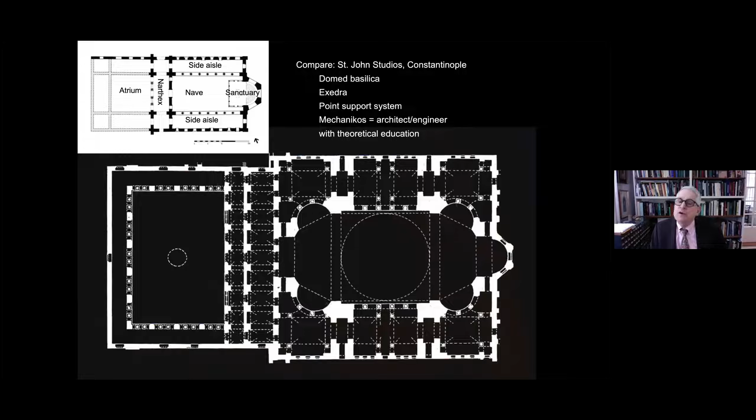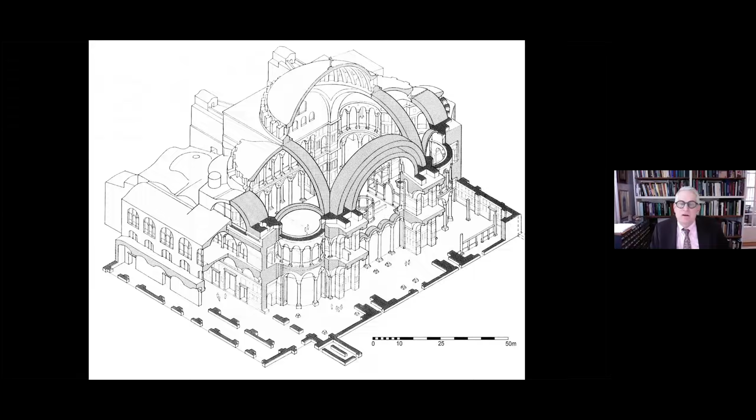And here we can see in the design of the building the system of arches and vaults that is adjusting the thrust, the weight of the building, to the piers, the pier support. What this does is the areas between the piers become open, spacious, and filled with light. Here, looking across the nave, we can see the openness of the side aisles and particularly of the outer walls of the building behind them.

The typical opening in the wall of the building is, well, we have arches that are supported on piers, and underneath the arch, we have a curtain wall that is almost entirely given over to window. We have closure panels in the lower level, casement windows just above that, and then above that, we have glazing, so that the system is remarkably open. Now we have to realize that it is that arch that is the structural system, and everything underneath that arch is incidental to it. So we have, with the point support system, a great degree of openness that allows light to enter the building at multiple levels.

The system of point support extends through all parts of the building. When we look at the dome as it comes down to us today, the original dome collapsed and was rebuilt in 563. I'll talk about this later, but the original dome was similar in detail to what we see now. That is, it was a ribbed dome with the thin construction of the dome of brick and mortar strengthened by ribs, kind of like an umbrella is strengthened by its ribs. But this allows a ring of windows around the base of the dome, 40 ribs strengthening the dome with 40 windows opening around its base.

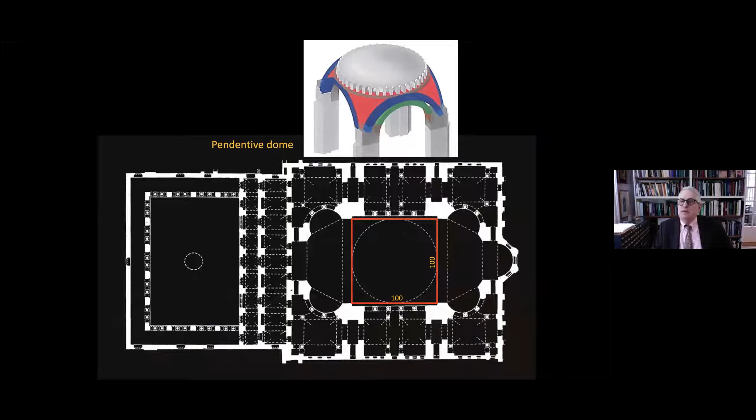In Byzantine measure, slightly larger than our modern feet, but 100 by 100 Byzantine feet, measuring off that central space. So the original dome, a pendentive dome, was transformed as it was rebuilt into a dome on pendentives. What are you talking about? Okay, let me explain in a way everyone can understand. And this is an experiment you can do over breakfast tomorrow morning.

Okay, start with a grapefruit. A grapefruit is round. It's round in 3 dimensions. That means it is spherical. It is a sphere. If we cut the grapefruit in half, we are left with a hemisphere. Are you still with me?

Okay. If we square off that hemisphere at the base, what we are left with is the configuration of a pendentive dome. That is, a dome that rises above a square base with the curvature continuous from the corners across the crown of the vault. And if we then cut off the top of the grapefruit, let's say the dome collapses, we're left with just what we see down here, and that remnant of the original surface of the grapefruit is the pendentive. And that is the remnant of the sphere that is at the beginning of the design of the Great Dome of Hagia Sophia.

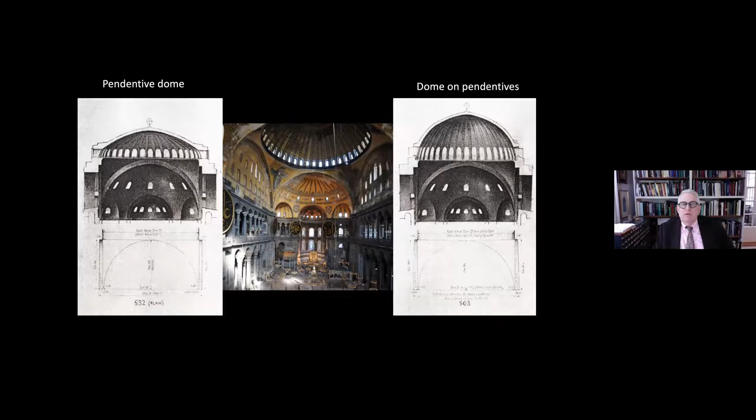Why is this important? Well, here first you see diagrams that show the much lower form of the original dome and the form of the dome as reconstructed after the original dome collapsed following an earthquake in 557. So to make sense of all this, let's get all Pythagorean here for a minute. If we have a 100 by 100 foot square that defines the main bay of the building underneath the dome, the original dome is not going to be defined by the geometry of that square. It's going to be defined by the diagonal of that square.

And you know from your Pythagorean theorem that the diagonal of a 100 by 100 foot square is going to be an irrational number. Now, the ancient Greeks and the Byzantines did not fully understand irrational numbers. They tended to round things out. And no architect, no matter how talented in the 6th century, would have begun the design of a great building like Hagia Sophia starting with an irrational number. He would have started, or they would have started, with a rational number. So how do we explain this discrepancy?

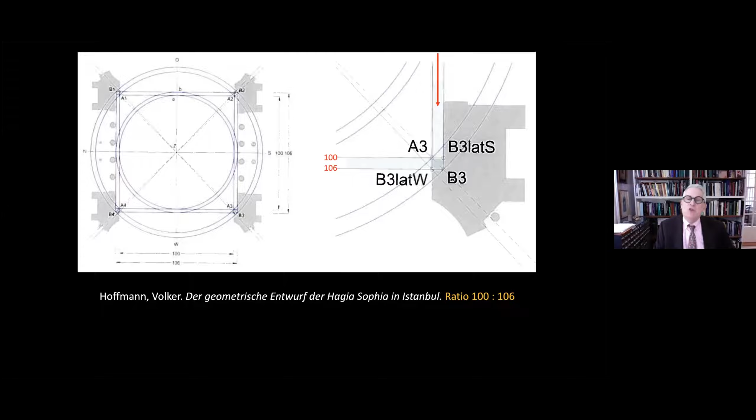And the best explanation that has been given, I think, is that explanation given by Volker Hoffmann, who suggests that the design of Hagia Sophia's first dome is not just based on the 100-foot square, but there is an additional width to the nave, about 3 feet on either side, so that we actually have a double square, the outer square here measuring 106 feet rather than 100 feet. And this, carried up to the level of the vaulting, would allow setbacks at the level of the vaulting.

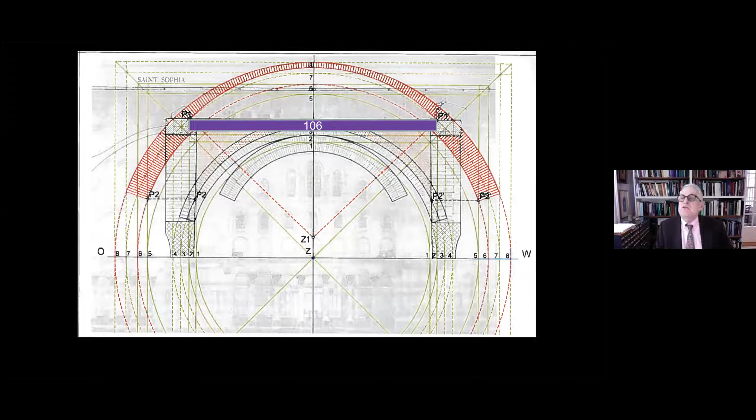Why is this important? Well, if we move back to our Pythagorean theorem here, and we go to a 106-foot square, the diagonal of that is going to be 149.91 feet. That is close enough that the Byzantines would have counted it as 150 feet. What this means is that Anthemius and Isidorus did indeed begin with a round number. And they began with a very significant round number.

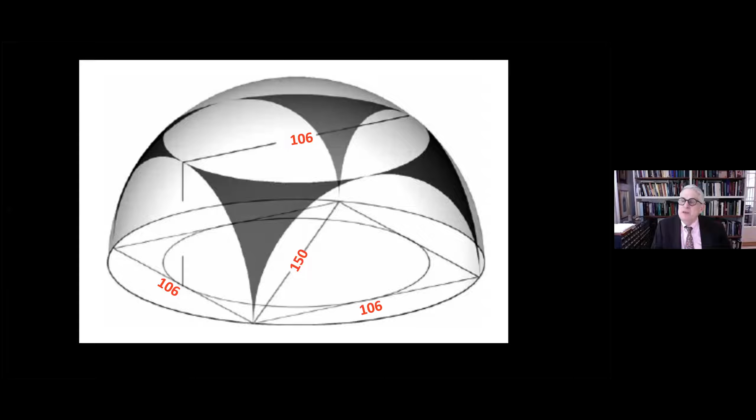For, well, what other great building from antiquity do we know had a dome diameter of 150 feet? That building, of course, is the Pantheon in Rome. 150 Roman feet, a slightly different measurement, but the numerical correspondence here, I think, is noteworthy. And I suspect what we're looking at here is part of Justinian's competitive discourse with the Roman past carried out in architectural form. Hagia Sophia, in this respect, can be seen as an improvement on the Pantheon.

Well, after all, the Pantheon is heavy and closed on all sides. It's supported by thick walls, 25 feet thick at the base. And the structural system only allows one point of light to enter the building, the oculus at the crown of the dome. By contrast, Hagia Sophia, switching to different construction techniques and switching to a point support system, allows light to enter at multiple points in the elevation of the building.

At least 6 different points in the elevation of the building have windows illuminating the building throughout. And as a consequence, rather than the heavy closed off forms of the Pantheon, we see in Hagia Sophia a space that is spacious, open, and light filled. In effect, Hagia Sophia does the Pantheon one better.

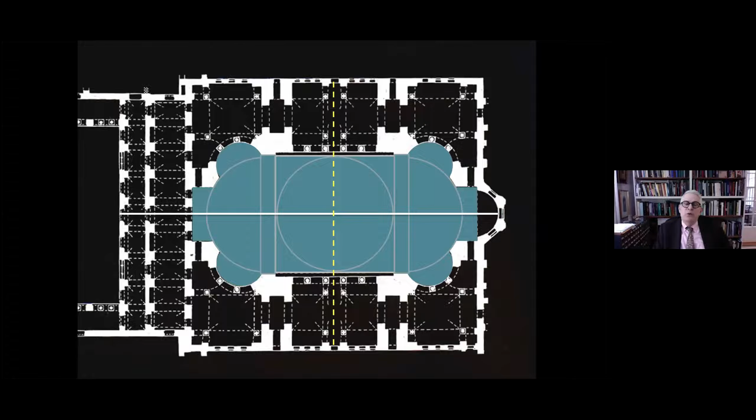building. But the system does not extend along the transverse axis of the building. It does not extend into the side aisles and galleries. It affects only the nave vessel of the building. This is very clear when we look at the comparison of the longitudinal and transverse sections of the building.

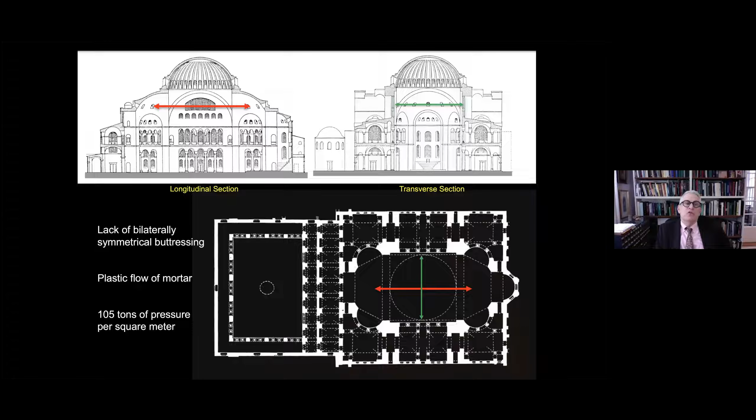On the longitudinal axis, we've got that central dome braced by vaults to the east and west that cascade downward in a logical and structurally efficient way. On the transverse axis, we have, well, arches underneath the dome, and then we have clerestory windows. That is, there is nothing that is bracing the outward thrust of the dome at the critical points. That is, at where the arches meet the dome. So that transverse section does not work well structurally.

What this results in is what we would call a lack of bilaterally symmetrical buttressing, a phrase I make my students memorize. That is, we've got a structural system that is flawed. It works well on the longitudinal axis, but not on the transverse axis. And this structural flaw in the building is exacerbated by several other features. One is what we know is the plastic flow of mortar.

Now, the walls and the vaults of the building are built of brick laid with copious quantities of mortar. Lime mortar has the particular quality of appearing solid when it has not yet set to its ultimate hardness. And with the quantities used in Hagia Sophia, it would have taken years for the mortar to set to its ultimate hardness. But as we know, Hagia Sophia was built in record time, from beginning to end in less than 6 years. A remarkable achievement even by today's construction standards.

But what this meant in terms of the wall and vault construction is walls and vaults will appear solid even when they are not yet solid. And the mortar will deform as thrusts are exerted on it. This is also exacerbated by the great weight of the building. Hagia Sophia may appear light and airy and insubstantial, but it is in fact quite heavy.

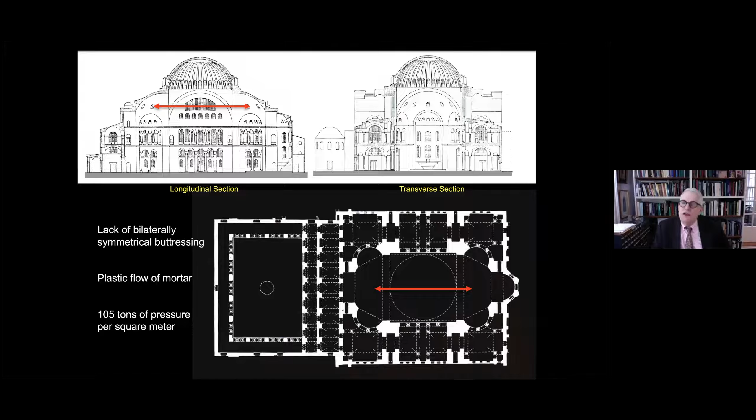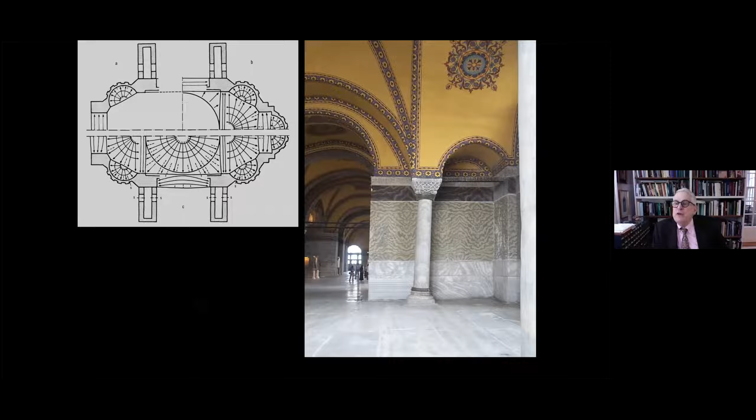We know that the building was exerting 105 tons of pressure per square meter on its foundations, and that the individual bricks used in the construction of the building weigh about 20 pounds each. So this is a heavy building. And that deformation of the building is something that is evident in so many places in the interior of the building, perhaps most noticeably in the columns like this one here in the gallery, which are sort of leaning over sideways by the thrusts that have been exerted on it.

Now, the critical point for supporting the dome would be the crown of each of the arches. East and west, we've got half domes. To the north and south, we just have a great arch here. And we've got these buttresses. One of the problems that structural engineers have toyed with looking at the building is, why are these buttresses where they are? They're really in the wrong place.

If they were there to support the dome, they should be in the middle of the arch, bracing it at the critical point. They're not. They are at the corners of the domed bay. So are the buttresses here really misplaced in the design of the building? Well, one of the things that we have to realize is that, well, the building is huge.

If we look at the diameter of the arches that support the dome, these are 100-foot in diameter. The arches that are open across to the east and west, and to the north and south would have been freestanding arches during the process of construction. These arches are larger than any surviving Roman arch in their diameter, and they would have weighed an extremely heavy amount. They would have pushed against the piers that support them at the bottom.

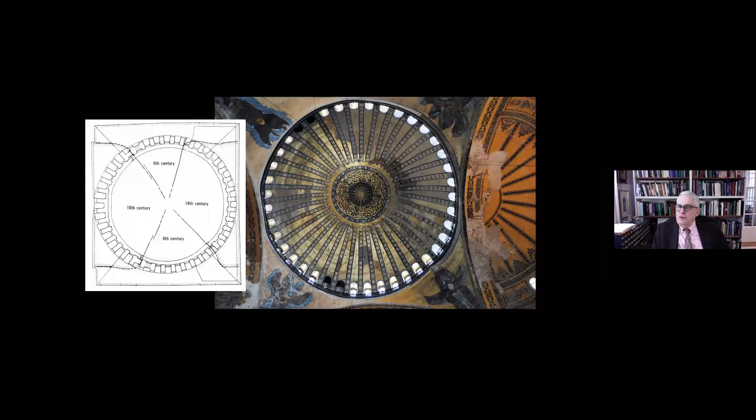But the structural problems were never addressed throughout the history of the building. As a consequence, the western portion of the dome collapsed and was rebuilt in the 10th century. The eastern portion collapsed and was rebuilt in the 14th century. And the dome only stabilized in the 19th century when cable was wrapped around its base. Okay, so that's the structural system of the nave vessel and the various problems associated with it.

One of the problems that architectural historians face looking at the building is how do we connect the design of that central vessel of the building with the secondary spaces around it? And various propositions have been made. Lots of gymnastics have been performed with compasses and rulers to try and find what is the guiding principle that connects the secondary spaces to the main space. My argument here is that they are designed as two separate systems.